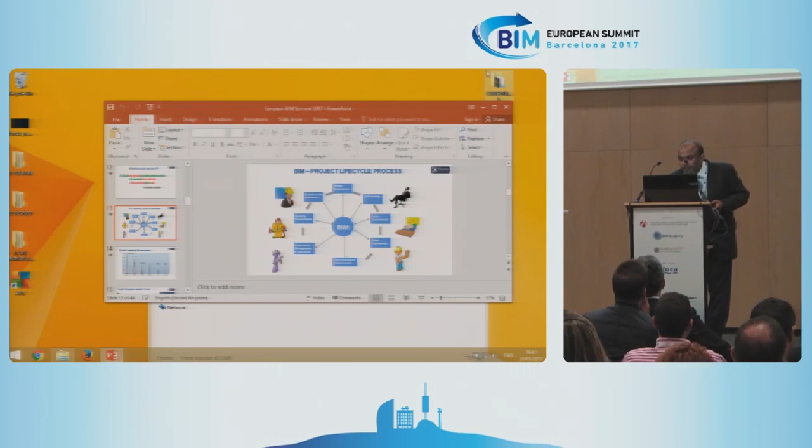Look at this stadium that we are doing now in Doha. This stadium is just starting to build, but the whole planning, every day, what work will be done, where will be the site logistics, just look at this, how you're going to do your construction, everything is planned in this particular project. It's a huge new stadium that is coming up for the World Cup football in 2022 in Doha. This is the inaugural stadium. And look at the level of planning, the whole site logistics.

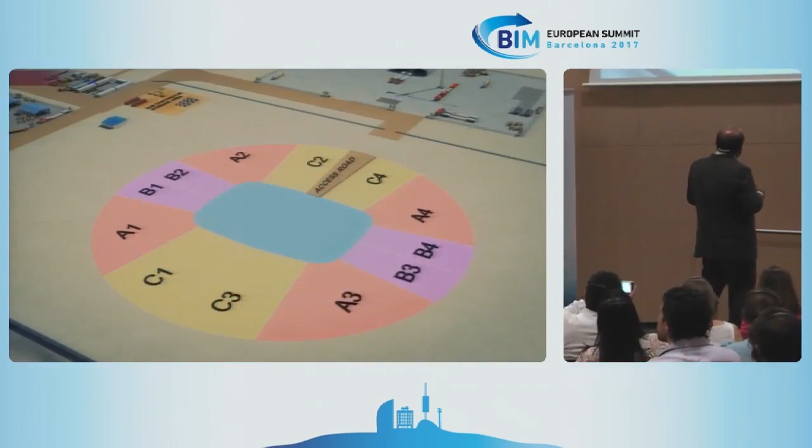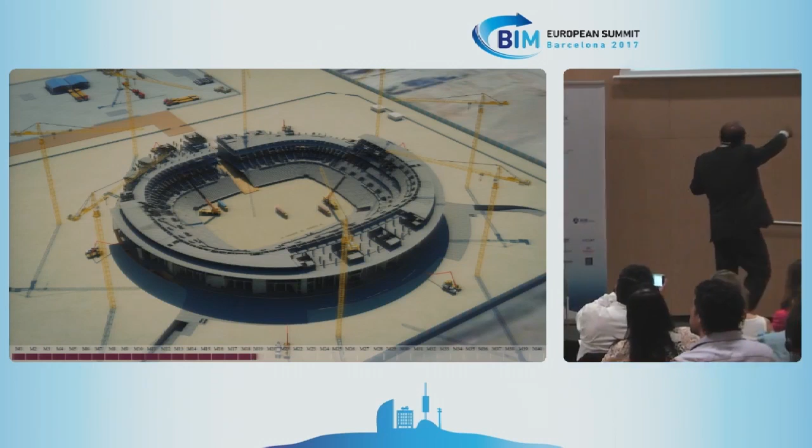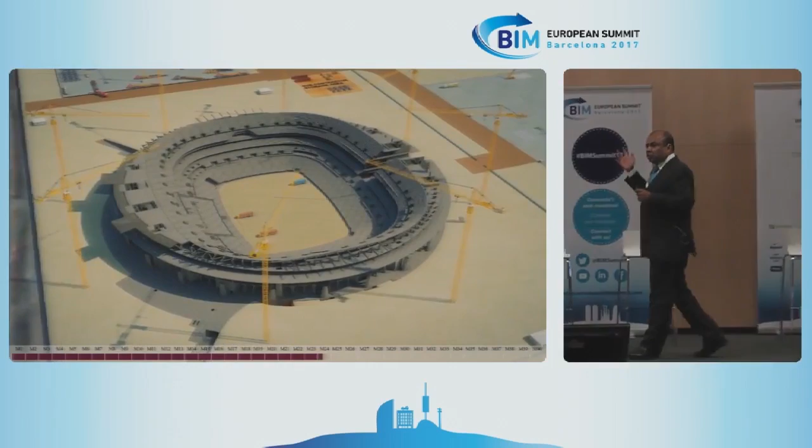I have reduced the total video because there is less time, but you see the cranes, how they are going to be placed so that they don't obstruct each other. So all the site logistics also needs to be planned. Every small detail, and you can see the time here, the monthly progress, so every day what work will be done. If you stop it and ask, okay, on 15th August 2018, where will we be on the project, you can see from this planning. This is the level of planning we are talking about, so that we have complete details about the project. There is no way, the time frame is so short for this project, and you have so many stakeholders, we cannot complete this project unless we have this level of planning in our work.

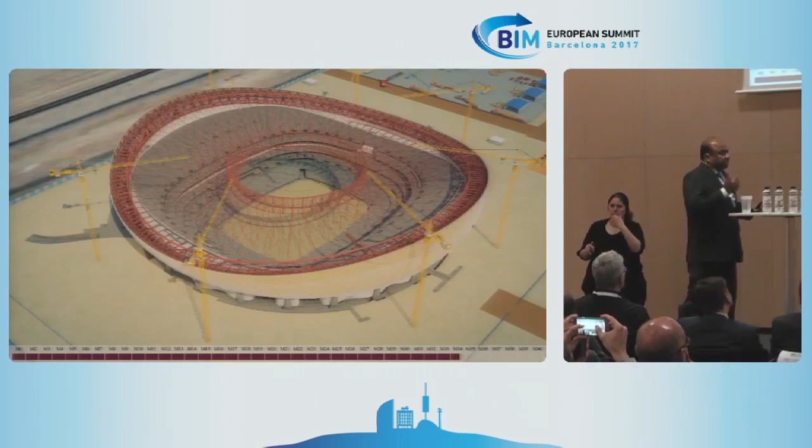And the best part is, for construction management, we get all our quantities. You want to know how much concrete is going to be used tomorrow, day after tomorrow, how much steel, what will be the cash flow, how many workers will be required, how many machinery will be required. So you get all the details from this particular type of coordination.

Okay, I'm going to now talk about another project that we are doing, and as the topic suggests, when you have such complex projects, what do you do beyond normal BIM? What are the innovations you bring on?

We are currently working on the tallest building that is coming up in Jeddah. It is 1.1 kilometer tall now, though it shows 1 kilometer. They keep increasing the height of the building because they want to remain the tallest. They are almost 30% more than Dubai.

The total area is 6 million square feet. There are 252 floors and 4 basements.

There are 59 elevators in this project, and for the first time I'm going to see double-decker and triple-decker elevators. There is 105 meters, 30 floors inside the ground, so you can imagine the kind of foundation that this building has.

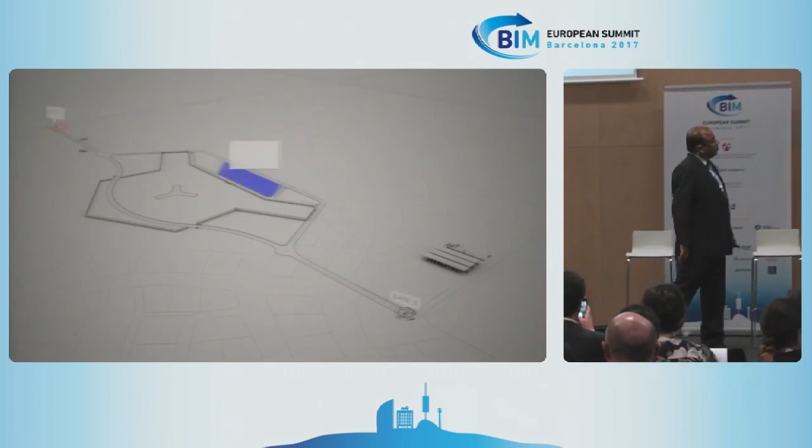Let me show you a small video on this. Just see how this building is getting constructed.

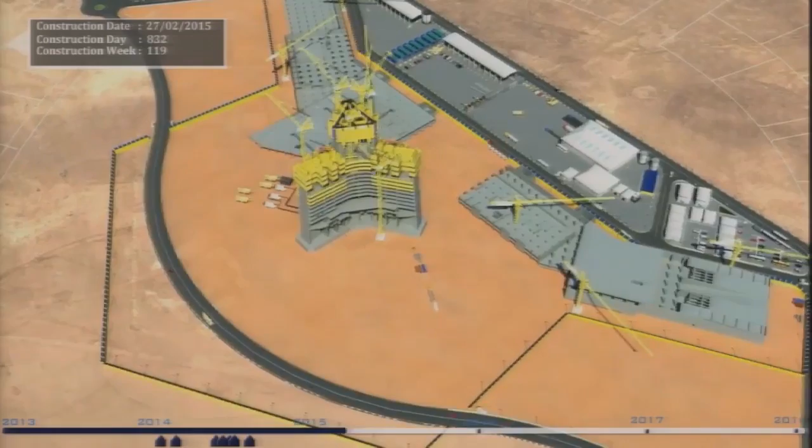We have already done the coordination till the 100th level, and they're pouring at around the 55th level now. It's slightly behind schedule. It's going to take another 2 years, probably 2.5 years, to complete the whole project, but it is amazing.

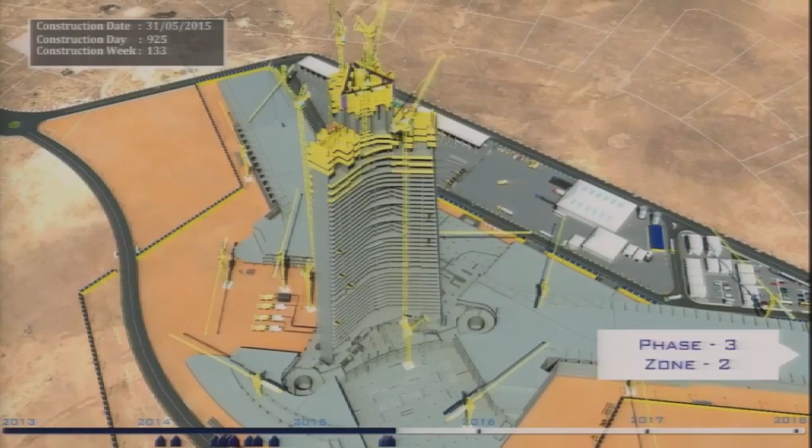You can imagine at the 150th level, if you have to take your pipes and windows and doors, it has to be absolutely accurate.

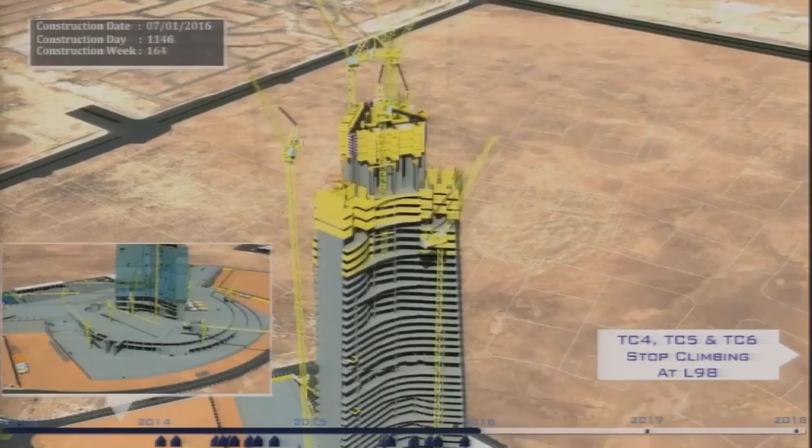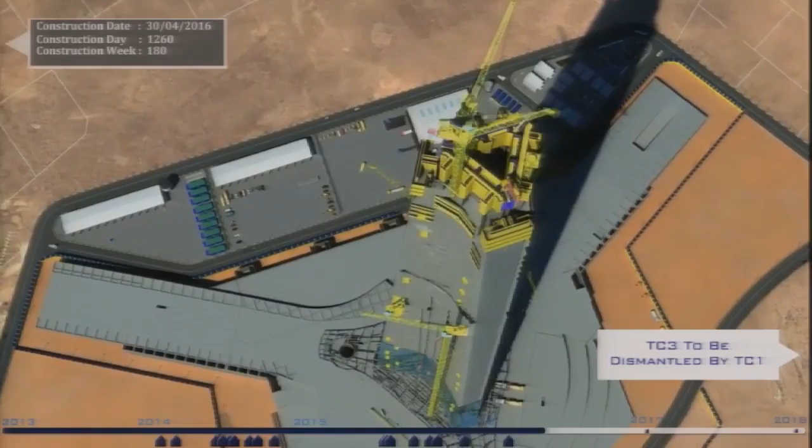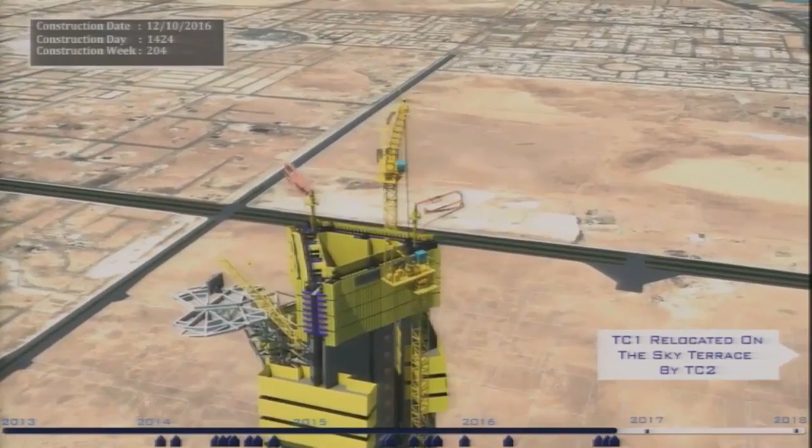As you can see, the core and the wings - the core is going first, and the wings follow that. In this project, the structural engineer will not allow you to touch the walls, the core walls, because it's so critical. So if you have forgotten your sleeves, you just can't make any more. You're not even allowed to put a nail inside the columns and beams.

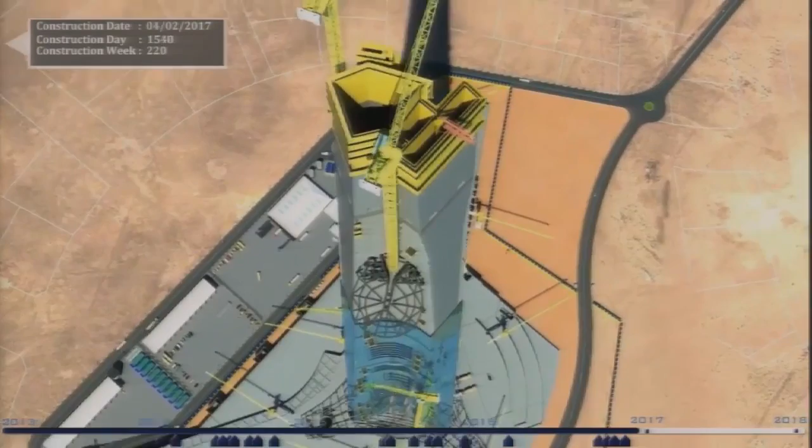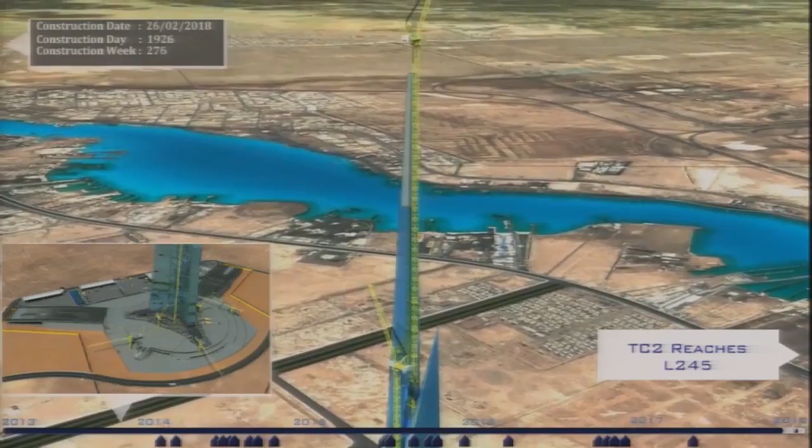So the coordination becomes very important. All the MEP services running through this whole building have to be pre-planned, because there's absolutely no way you are allowed to drill holes or even put a nail in this building.

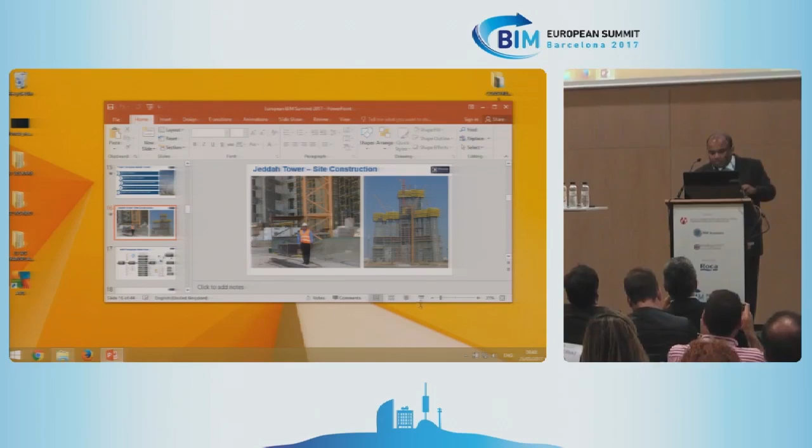Okay, let me come out because we have shortage of time. Okay, let me quickly go.

So what do we do for executing this project? First thing is the collaboration, because you have so many design consultants, architects, owners, so many contractors. So we have created a very important collaboration, the BIM execution plan. It was very special because there is so much involvement - we have to do the design development, and you can imagine the millions of documents generated in this whole project.

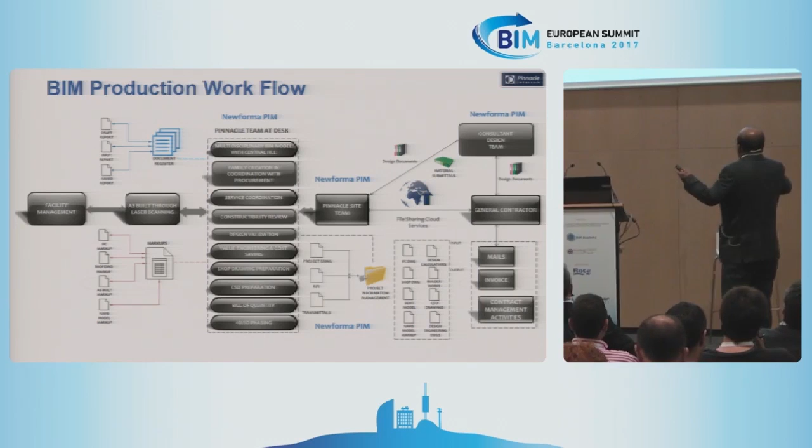For 3 years we have been working on this, with more than 100 people, so you can imagine the kind of documents. We are using Newforma here, where we integrate everything on a cloud. Every document, every renaming, every plan has to be very well done for this type of project.

Now, design engineering - you have to recheck all the pump head, because the original concept design requirements are changing. As the hotel owners get finalized, the marketing team changes the apartments, the layouts are changing, the usage is changing. So you have to calculate everything fresh.

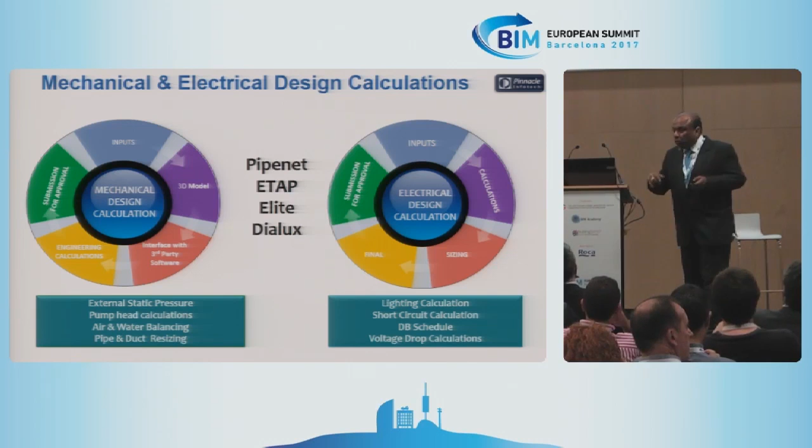So what we have done is, from the Revit model, we have integrated with various design analysis software to do this particular design - whether it's external static pressure, pump head, or air. For example, we are using Elite to calculate the ESP.

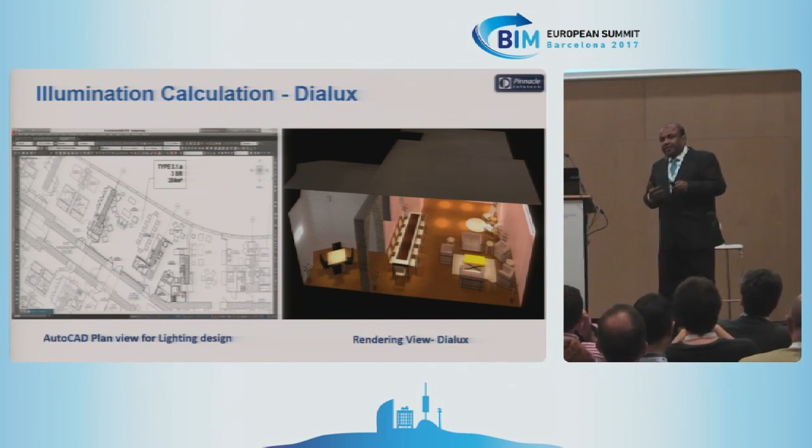Similarly, for dialux, now you have a lighting requirement at every area, in the corridors, in the rooms, so we use the dialux software. Similarly, PipeNet, ETAP, and there are many softwares which you need to interface very intelligently with this.

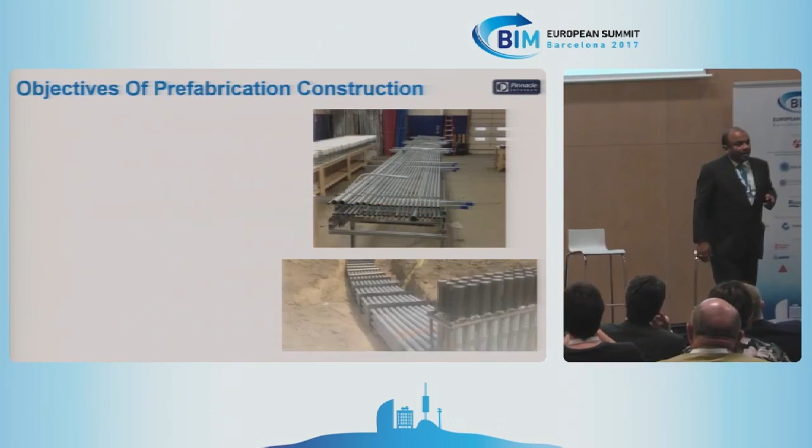Now, this is another thing I would like to show you. This is very interesting - today we are talking of modularization. The way we do MEP services, traditionally we have been hanging each service separately.

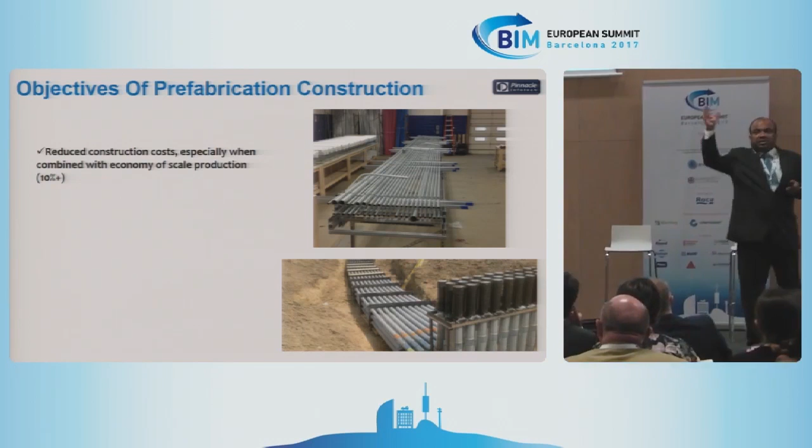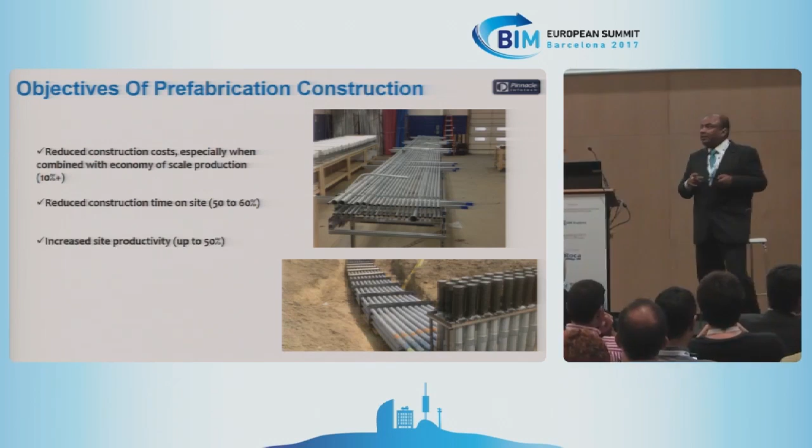Time has come when we combine all these services into one module, one rack, and just hang them. Now what are the advantages? I'll show you. There's a 10% reduction in cost because of economies of scale, 50 to 60% construction time reduction on site. The productivity goes up. Now what is modularization?

Now this is the traditional on-site fabrication. In one of the projects in the US, you can see that outside there's snow going on, and inside that building it's a hospital project. So they have pipes on the racks, they weld it on site, and if they cut any pipe, it is a waste.

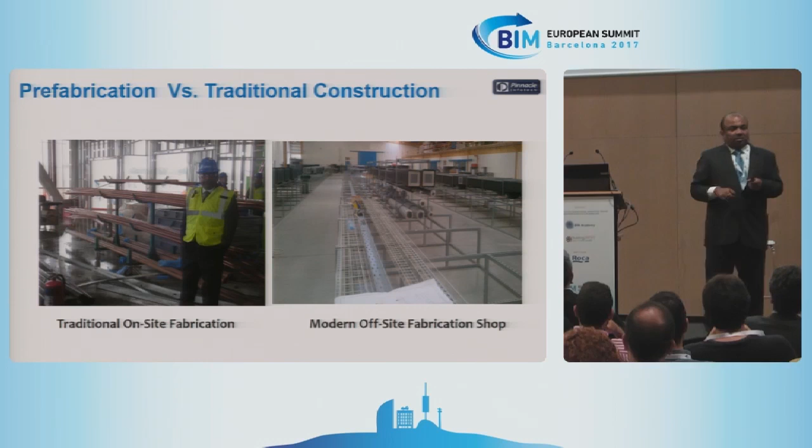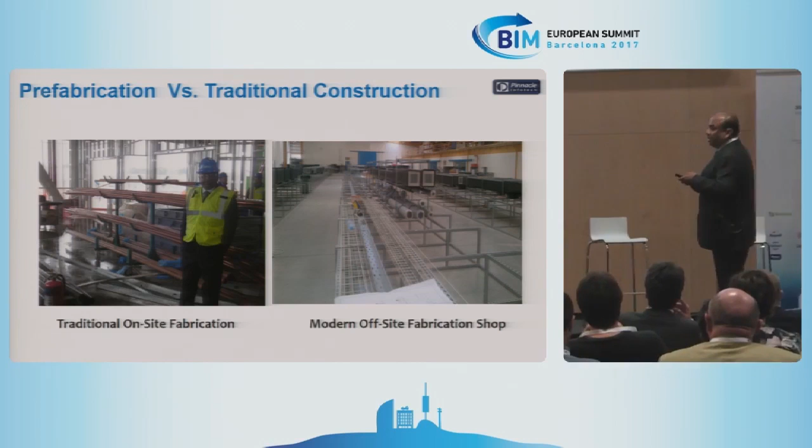Whereas today we have to industrialize construction. We have to, as the term was used yesterday, make assembly lines like cars and automobiles. We need to have assembly lines for creating our MEP services, for concrete, for everything. So this is what we need to do. Let me show you.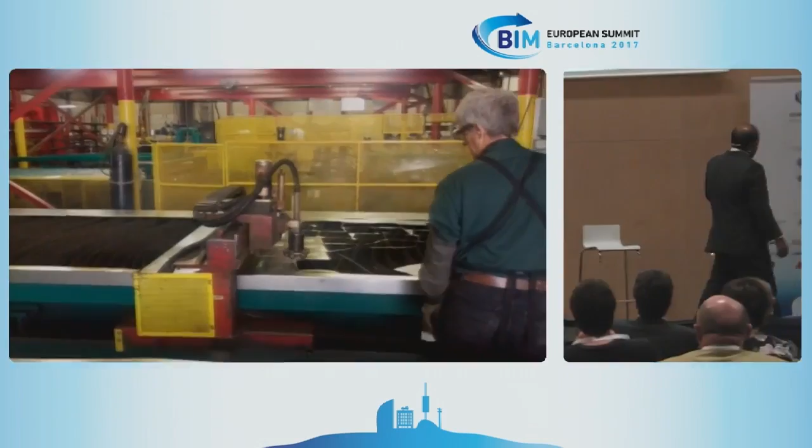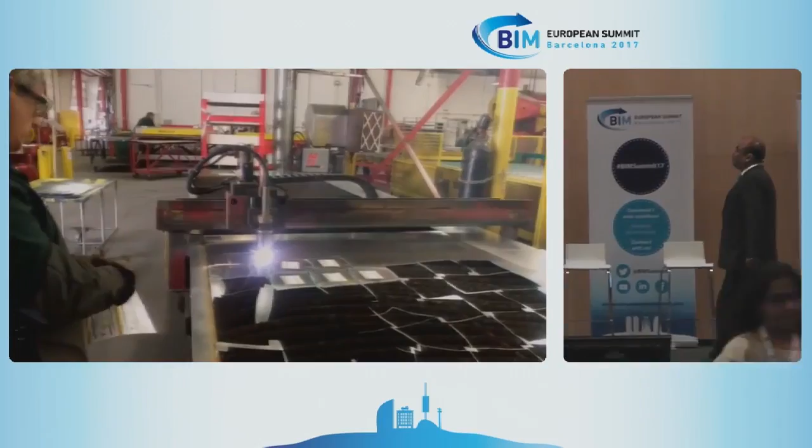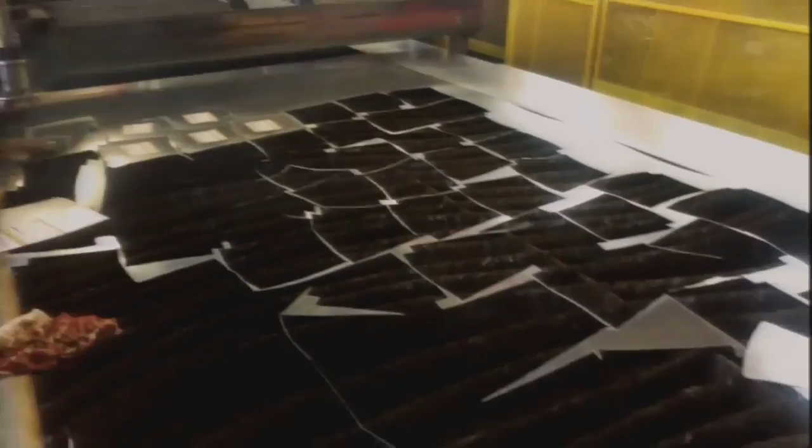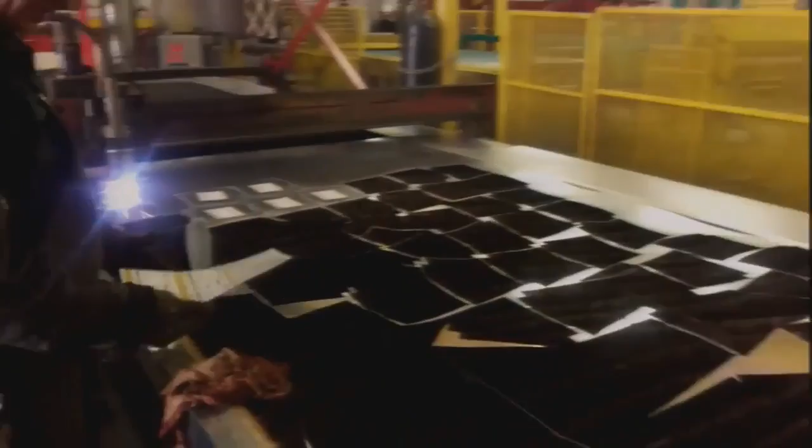This is another very nice video, just see this. This is the sheet metal for air conditioning, which is being cut. Now, from the BIM model, it directly goes to the CNC machine and it cuts it. And it's got the scan codes, putting the scan code on that, so that on site they can just use it.

Now, how many of you are general contractors? Can you please raise your hand in this room? General contractors, MEP contractors. Okay, they should be, because this is really relevant.

I don't know how much it is being used in Europe, but if you look at this, look at this sheet, it's just 2% wastage. So if I have a big sheet, from my model it's directly going to the CNC machine, there's no manual interface. The machine calculates, optimizes, from different ducts it will optimize to cut the sheet to reduce wastage. Everything is automated, and you can see the end product, nothing left in that particular sheet.

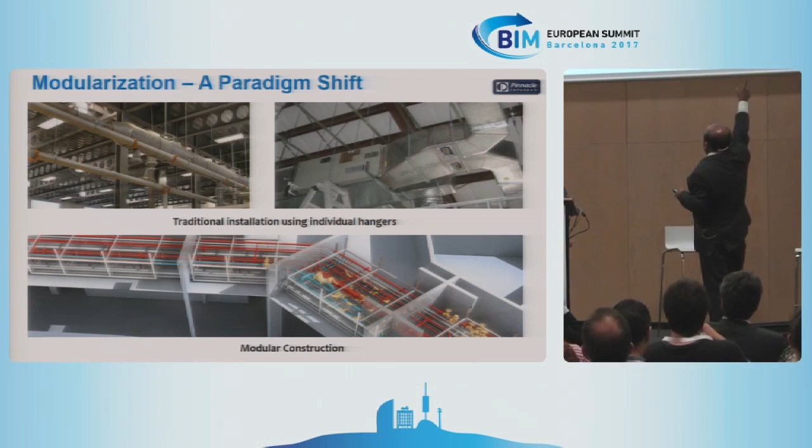So when you're having this fabrication, traditionally this was done, the modular, look at this, how it is being done. You manufacture everything in your fab shop, take it on a truckload, take it to the site, and just put it inside. So it saves when you're working on busy airports, when you're working on additions, renovations in the center of the city. This is the only option left because there's no space for work in the city.

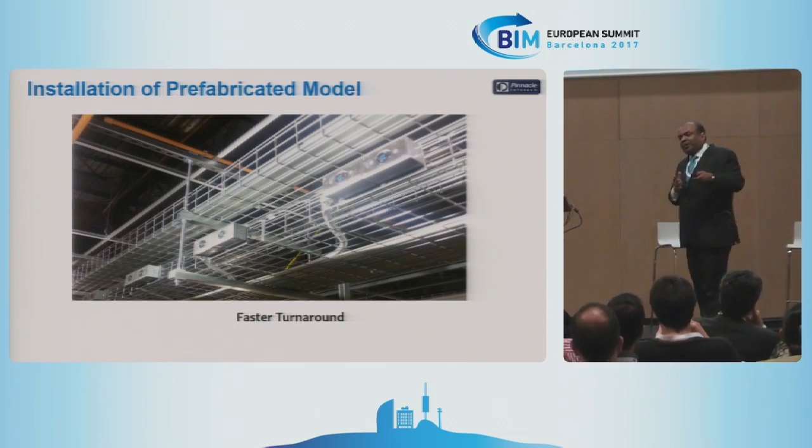Look at this, so everything is fabricated in your shop. Your site labor is much costlier, there are weather conditions so you cannot do it always. But if you've done that in your shop, the quality is much better.

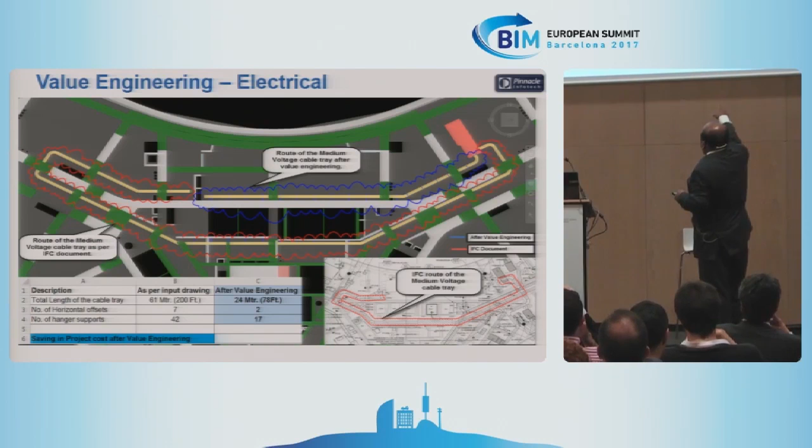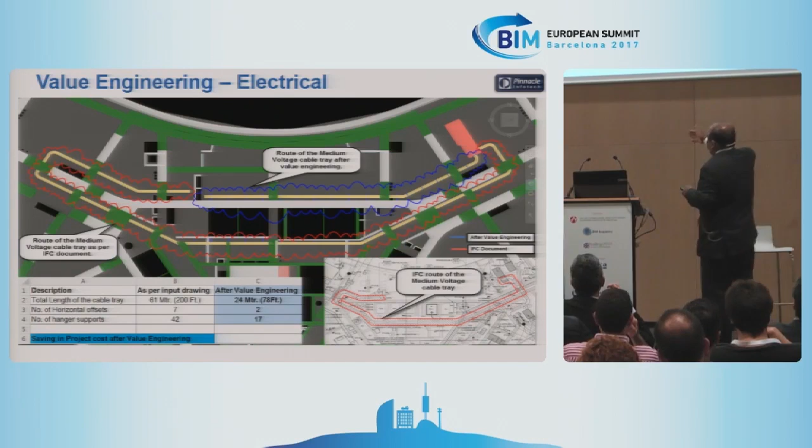Similarly, value engineering. When you come to BIM, we have to reduce cost. If you look at the original design, there was 61 meters of cable tray that was used. We could reduce that to 24 meters by optimizing inside the BIM. So once you have everything in 3D, you're able to find better routing, the number of hangers goes down, the number of offsets goes down, so it's much easier.

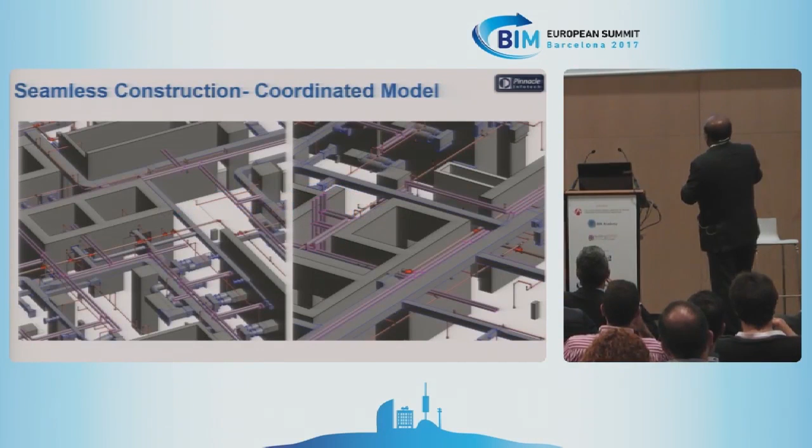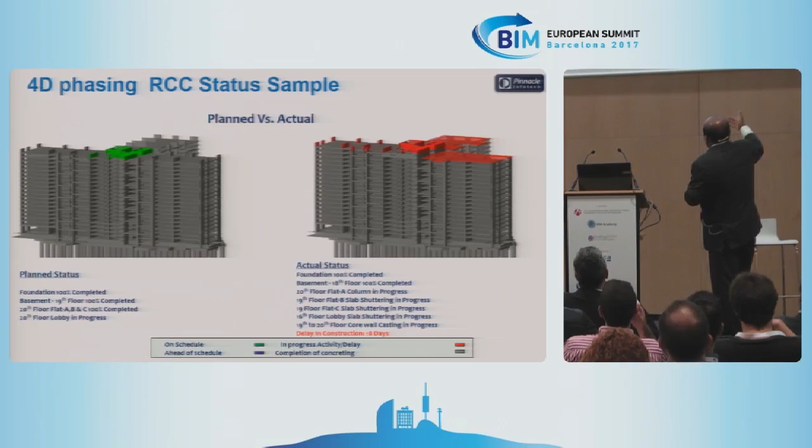So these are the value engineering experiences. Now, this is what we want: the construction management, the GPS-based solutions. We have seen the site logistics, construction planning management. We'll have questions at the end. Thank you, my time is up. I wish I had more time to show you various case studies, but thank you very much for your patience.

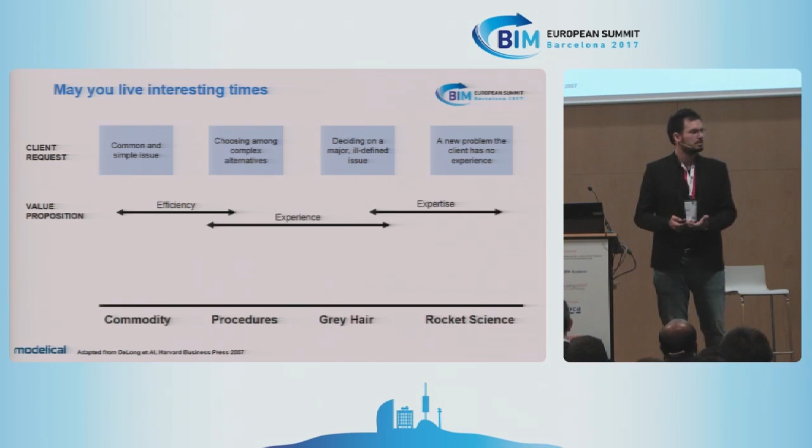The value we are providing in such different cases is different, right? It changes. We need to be efficient if we want to solve commodity problems. We need to apply experience if we're going to go for the middle, and we need to have expertise if we want to do rockets. And the different skills you need to follow on your organization are going to be different as well, right? If you have to be efficient, you have to have the right tools, the right processes. You have to have the right knowledge management strategy. You have to be up to state-of-the-art technology, and so forth, right?

And if you look at the bottom row, many of those words there are very related to BIM, right? Very, very connected to BIM. You could speak about all of those without leaving the BIM context. So let me throw a question at you at this time in the morning. Where are you, right? The things you do, are you solving commodity problems? Are you solving gray hair problems? Are you solving rocket science problems, right?

If we were to make a survey here, based on your self-assessment, this is what we get. None of you is going to say it's doing commodity problem. You know what a commodity is, right? And a commodity is something like water, right? You will open the tap, water will flow. You don't actually go on tender. You don't ask where the water comes from. You're not asking for its BIM implementation plan, right? You just open the water tap and it comes. It's a commodity. It's like when you ask for modelers to be sourced to your company, or you are asking for a model itself, right? It's starting to become a commodity.

Right? So if we were to do a self-report here, this is what we get. No worries, it's okay. But if we look from an empirical point of view, we get some judges here looking at what we actually do, including all of us, this is what we get, right? We're most likely doing commodity work, right?

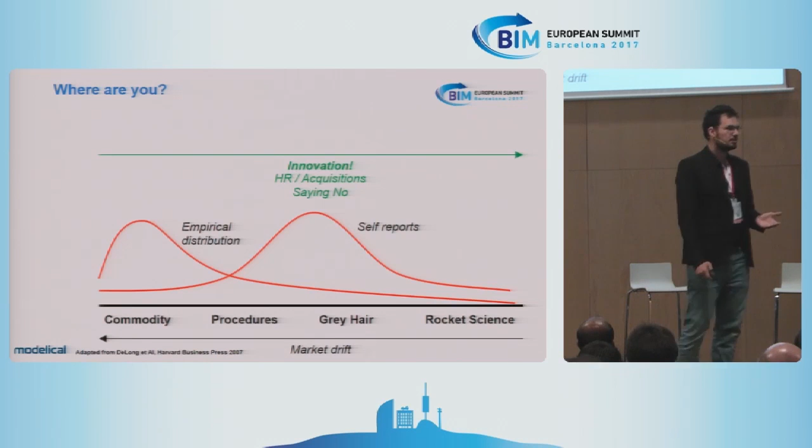Well, of course, innovation is one of the things that will make that happen. But there are other ones, right? We could get skilled people, we could buy skilled companies, or we could say no to commodity work. You could say no and say, I don't want to do this, I want to focus on my rockets, I want to focus on my high-expertise, high-paying work. But at the end of the month, you have to do the payroll, you have to pay the bills, right? So sometimes it's hard to say no to commodity work.

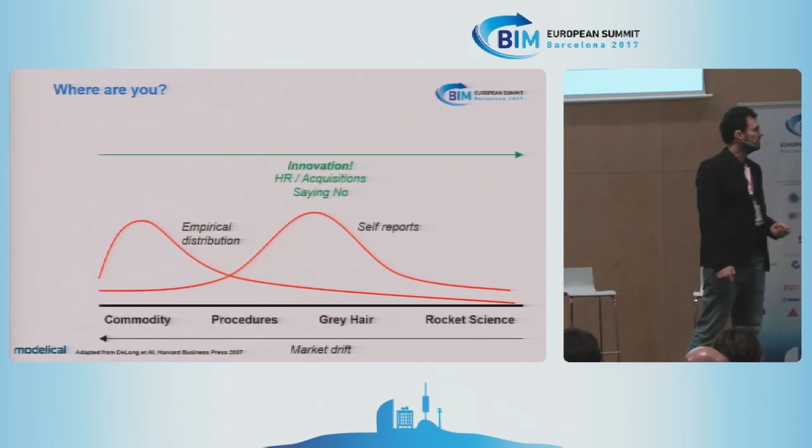Let's now look at the value all this brings to the client. There are things you can do that bring value internally, and there are things you can do that bring value to the client. When you're doing commodity work, the client isn't very worried, they just take for granted you will do the work. So innovation there doesn't pay very well to the client, it pays well internally. If you're going to innovate when doing commodity work, it has to be for yourself, otherwise you're doing it wrong, because somebody else will underprice you and you won't get the commission.

But of course, when you're doing rocket science, the innovation goes to solving a big client's problem. Besides that, you could provide your client with insights, so when you're not only solving the problem but making them learn something new based on your experience and the things you can do, you are adding value to the client.

And of course, there's always marketing. I used to think marketing was a perverse thing, but it's true, you need it, you need to spread the message, tell everyone hey, this is what we're doing, we're cool, you want to work with us. That works well the further you go to the right, because you also have to explain better what you're doing. When you're doing commodity work, you don't need to advertise, it's not that important, or it's hard to improve the message on top of that.

All right, so my key point here is that BIM, as you know what BIM is, I see it as a huge innovation opportunity—not only in the sense of being able to do things differently as a practice or as a sector, but also to provide new solutions to our clients. Let me give you some samples. Let's have a look at five samples, five levels of things we're actually doing at the office, and how they relate to what you want to do.

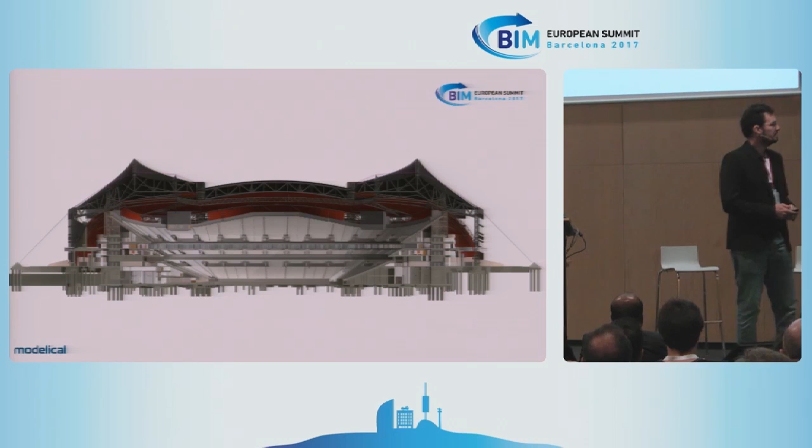It's a project we did with a partner in Qatar as well, and we were actually commissioned to build on top of the detailed design, CAD drawings. We were able to do a pre-construction model for just finding clashes and ensuring everything was fine. I'm not going to bore you, but we basically applied many different ways of automation.

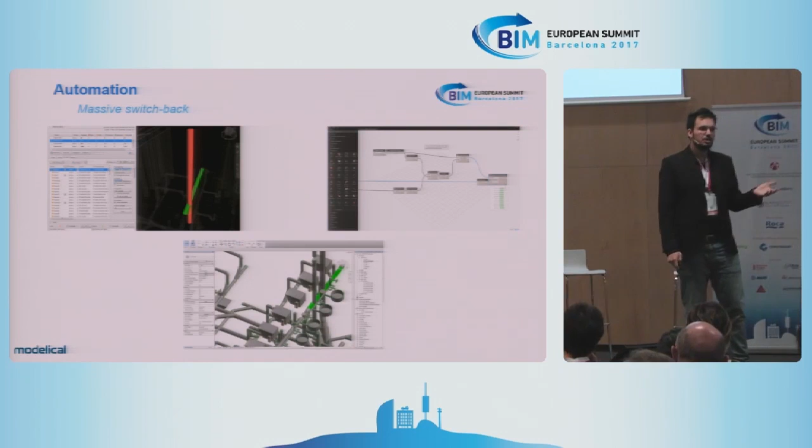For instance, we would go to Navisworks, look for clashes, and instead of producing this massive report - I don't know if you've been lucky enough to go through one of these clash reports - instead of doing that, we would just basically take or mark the items back into Revit automatically. So you could apply a filter, you could apply special views and see which elements were directly under an issue.

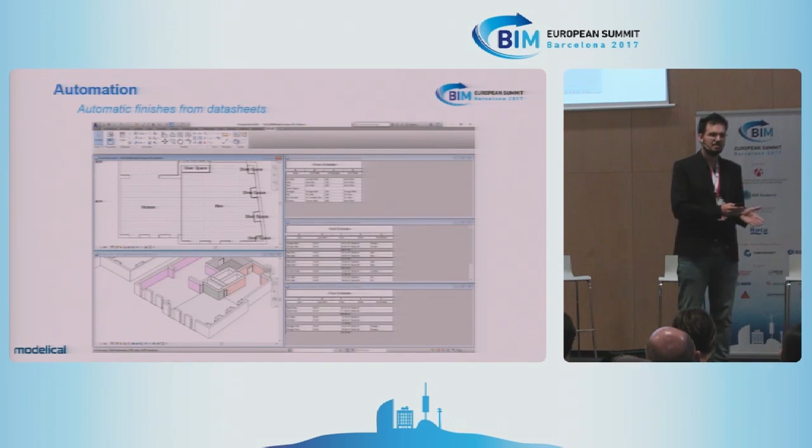We would also use spreadsheets to assign finishes to different rooms, and based on that, we would model the finishes on each one of the 2,000 rooms in the project automatically. Of course, that doesn't solve 100% of the problem, but we would solve 80% of the problem. So you need less people to do it, and you are making less mistakes.

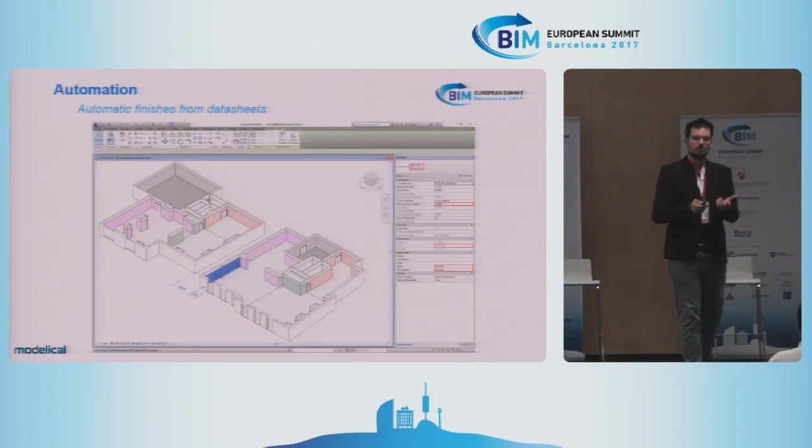What this would do is it will read a room's perimeter, and then it will read an Excel spreadsheet and will just apply the walls, the thin walls for the finishes. That will be the result, okay?

Then we started working on another project. This was almost one year ago. This is an airport - this is public. I cannot speak much because this is still under confidentiality agreements, but this is public, so you can see this, of course. And in this project, we again applied a lot of automation.

We basically were able to model hundreds and thousands of panels, thousands of roof lights, not even touching any of them, just applying computational techniques. We would just move between different tools - we would use Revit, Grasshopper, something called Flux, and we would use Excel, we would use AutoCAD. We would use many things just to drive the information in the best way possible that would spare us from modeling anything by hand.

If I give you a quick summary of this - something we did in 2014, it would take us six months to produce that model. Of course, it was more detailed, it had all the MEP on it. And I'm giving you some insights there - we were able to model almost 3 gigabytes of Revit files, clean Revit files. But the most important metrics for us are those 8,000 warnings and 6 months of work.

We were not good enough at that time. We would make a lousy model, it was not very good. But next time we had a big commission - because this airport is 1 million square meters - and we were commissioned to make an LOD 200 model in 4 weeks.

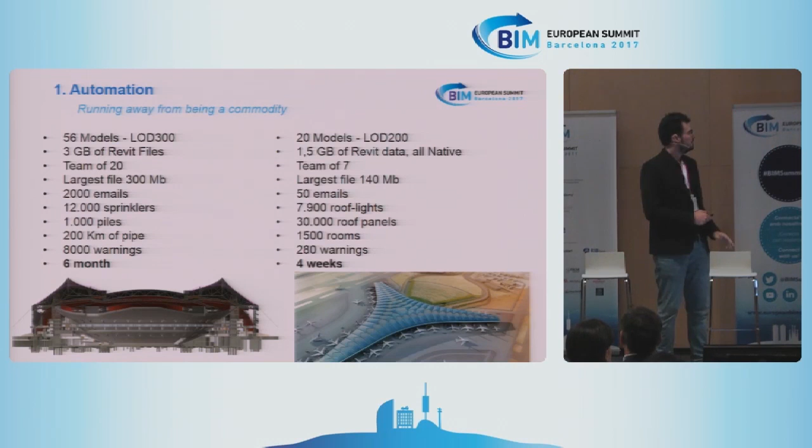Well, just how do we get there? How were we able to do this kind of work in 4 weeks? Not doing it manually, not trying not to do it - we just applied automation on it.

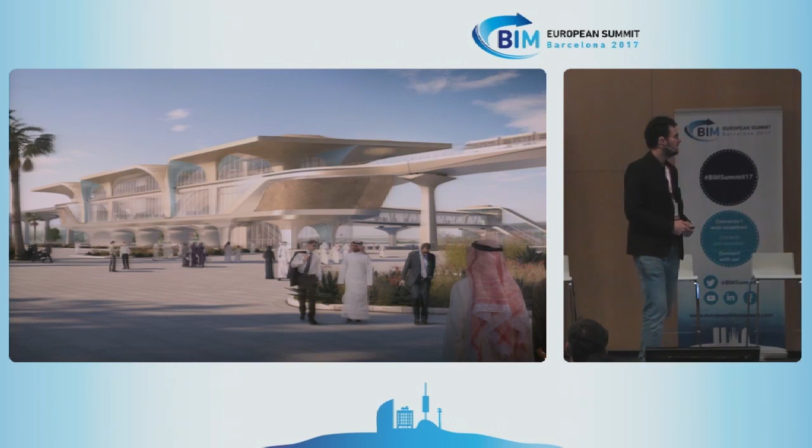Another project, which is also very famous around, many companies working here. We were lucky enough to work with several Spanish companies, and in this case, something we did for Sener. We have some good friends with Sener here with us today. We were commissioned or asked to model 6.5 kilometers of cladding in less than a month.

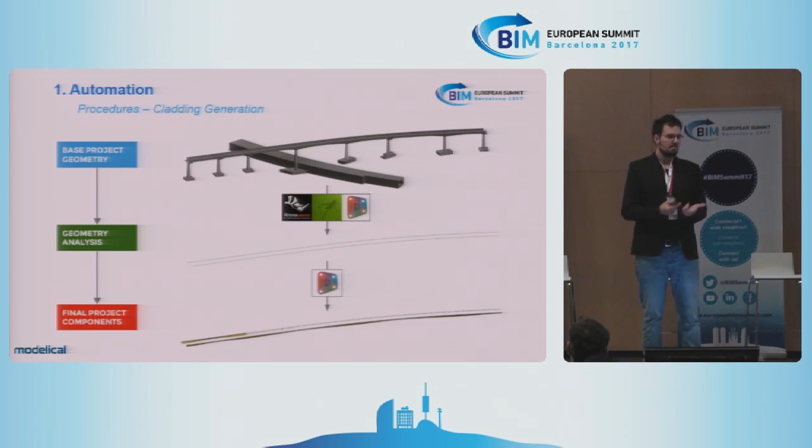Actually, they were like, Revit is not good for this. It's not. Actually, the guy who decided to do this in Revit and the guy who decided to design the metro like that are not the same guy, obviously. But by mixing different tools, by using information in the right way, we were able to produce all the cladding, or at least a preliminary version of it, in 2 days. It would have taken us months to do it by hand. So that's why we didn't try it.

You can see that's...

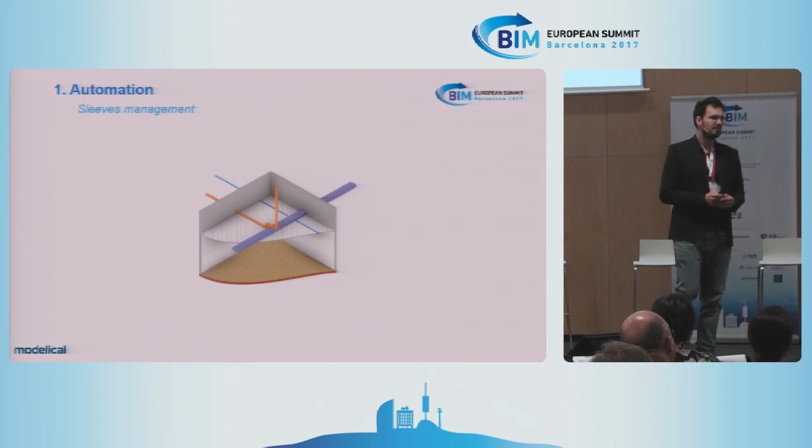Other things we do is apply a lot of thought on coordination. What you see here is a workflow we've been applying on the Santiago, Chile airport. We try to avoid coordination manually.

We create or find clashes between structural elements, structural walls and slabs and MEP elements, and place dampers and sleeves automatically. That's actually a coordination model, because you can exchange that model with the MEP engineer and the structural engineer, so both can speak on top of that third coordination model. And since each object has its own ID and its own properties, you can assign and review them independently. That's another way of applying automation to improve certain workflows.

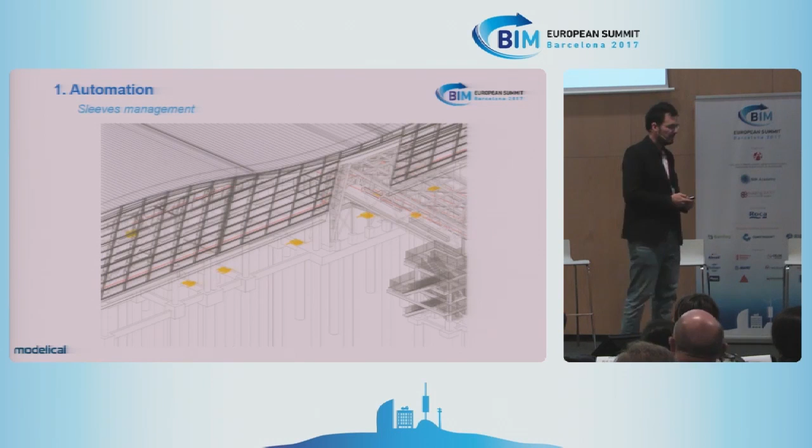You can see there the foundations of the airport.

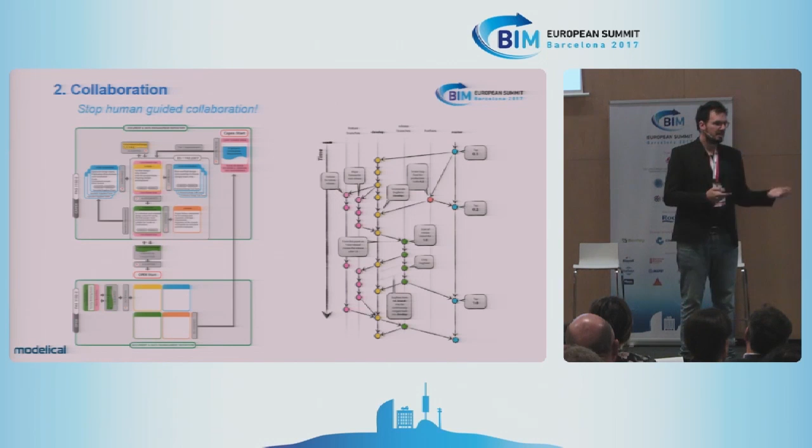Next topic I think we need to focus on for innovation is collaboration. I think we have to stop speaking about repositories and strategies and look to other industries, for instance the software industry. If software engineers were to produce software in the same way we produce models, we'd be lost. That's because they don't worry that much about the tools they use for collaboration, because the tools take care of the collaboration itself, making it more transparent.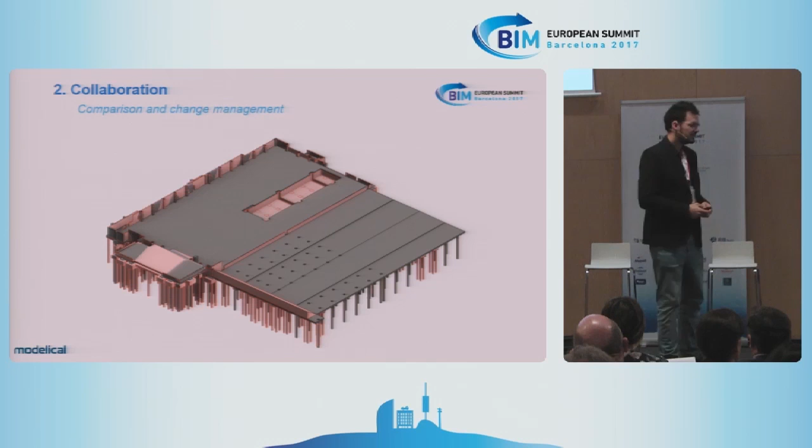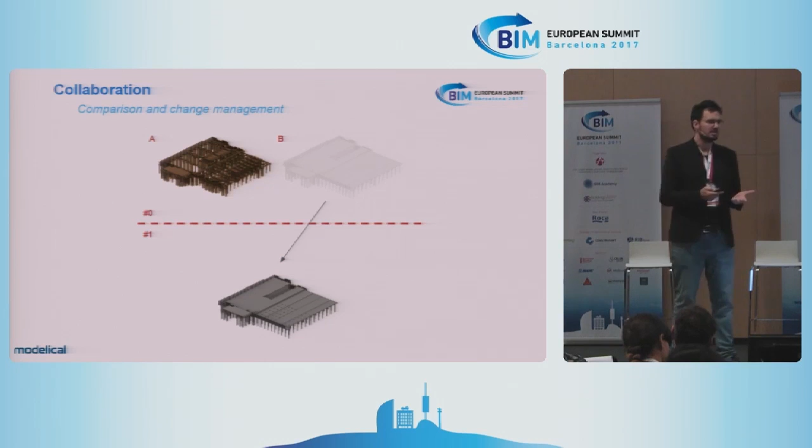We've been trying to focus on change management and comparison of different models in several projects with Sacyr on construction stage. We came up with a process where you'd always be able to track the changes along the project and make comparisons between two steps of the project. It's very important, because when changes happen in BIM, you have to look for them. You can mark them up somehow, but it's hard, it's still a hard task. And I don't see any of that in PAS 1192 - how do you manage changes properly?

This is what we need. It's very lousy, but it's a code comparison tool - you get the original code, the new code, and the tool will tell you where the differences are. It won't tell you if it works or not, but it will spot the differences for you. Do we have this for BIM? Not very clear, so that's another space for innovation.

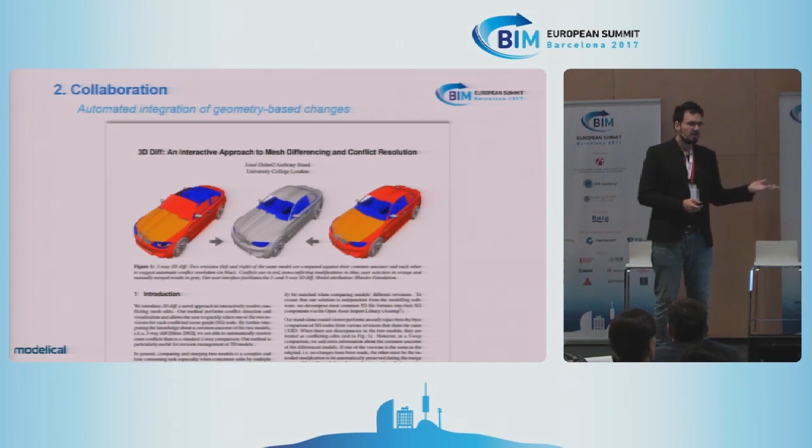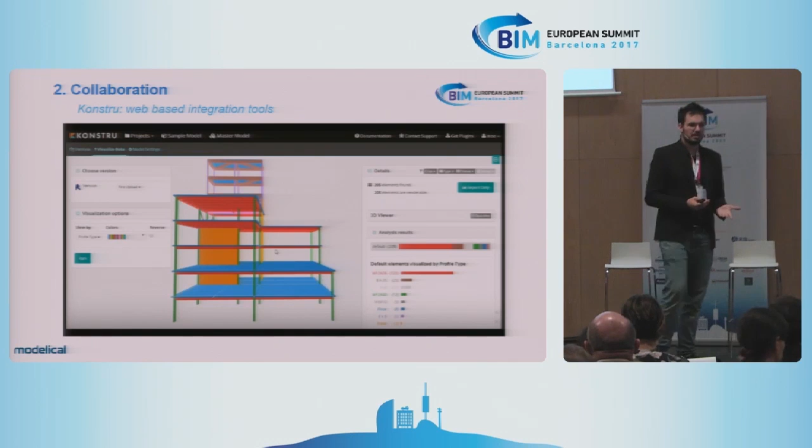There are algorithms and tools out there already trying to tackle this. For instance, Konstru, a tool coming out of an engineering firm, Thornton Tomasetti, actually trying to solve that for the structural design part.

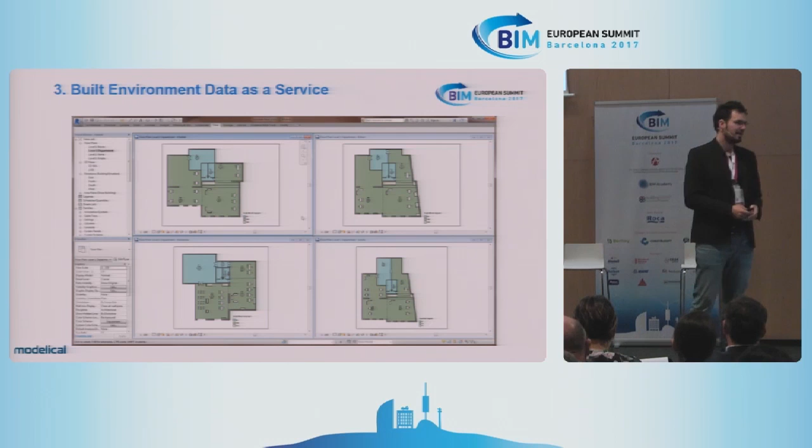Third area of innovation is what happens if I put all the information that describes a building available to everyone, or available for all purposes. Fernando gave us a great lecture yesterday, but this is basically the same idea.

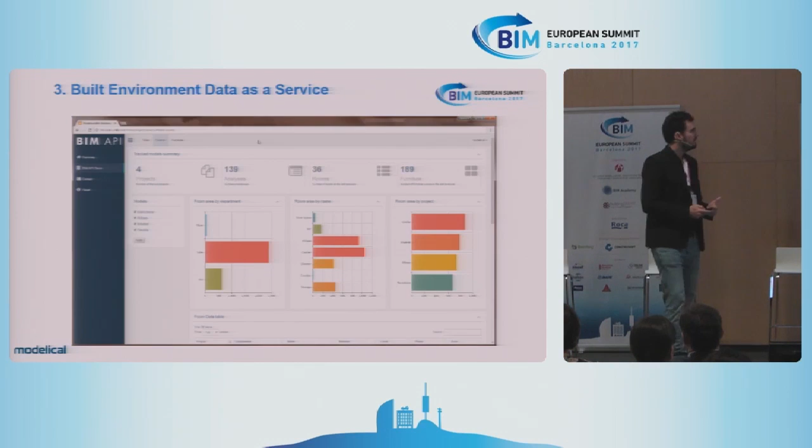You could think about the information described in a building as a service, in the same way your Facebook feed is a service that can be used by other tools. The idea is that information describing the built environment could be mixed with other areas. And who's going to do that - software engineers? Why don't we do it? We are the ones who are expert in the built environment.

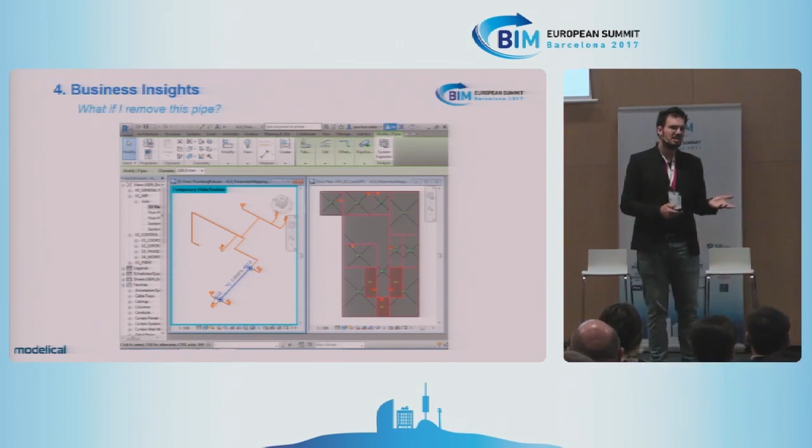Also business insights - this is something we did for a client who was about to build a stadium. He was asking, well, I don't need a very detailed as-built MEP model, what I need to know is if I remove this pipe, which spaces am I going to render unusable. So that's what we did - we modified Revit so that if you remove this pipe, you can see I'm serving three fixtures, so I'd be killing those three rooms. You're able to do that with the model with just a tiny bit of programming on top. That's a business insight because you can make business decisions based on that.

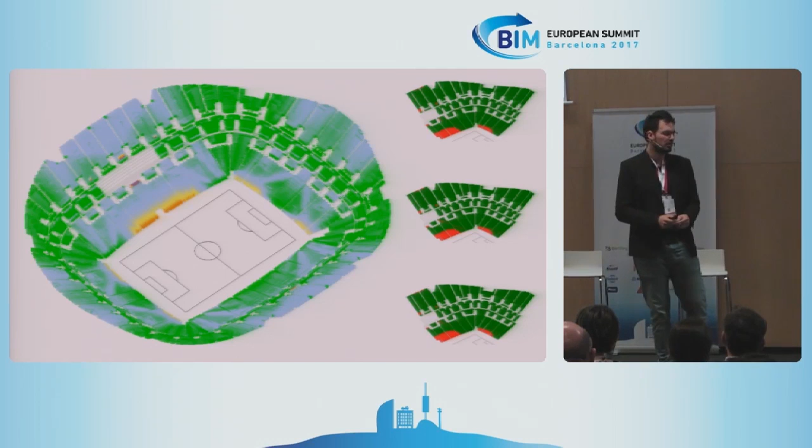Speaking about stadiums, when you have 100,000 seats on a project, you can do pretty good acoustic analysis. This is something we did for Al Khor Stadium, Khalifa Stadium in Doha, and we're also doing it in other stadiums currently.

Or you can actually start playing with information in a different way. You can offer your client ways of using those models that are more appealing, closer to the daily business. Here you have Camp Nou - this is something we've been developing.

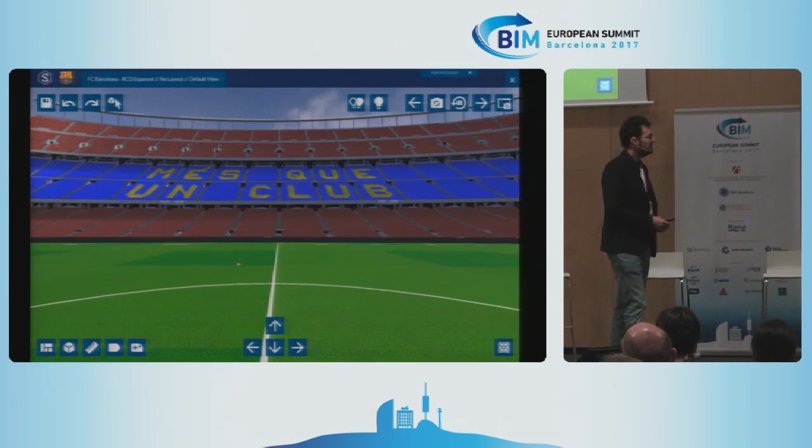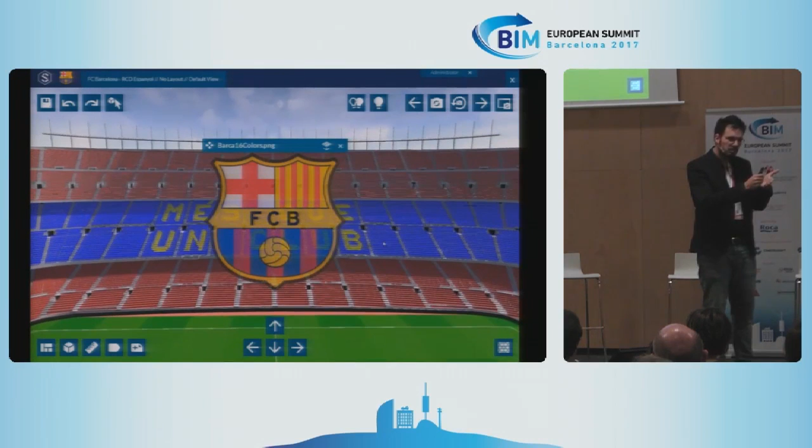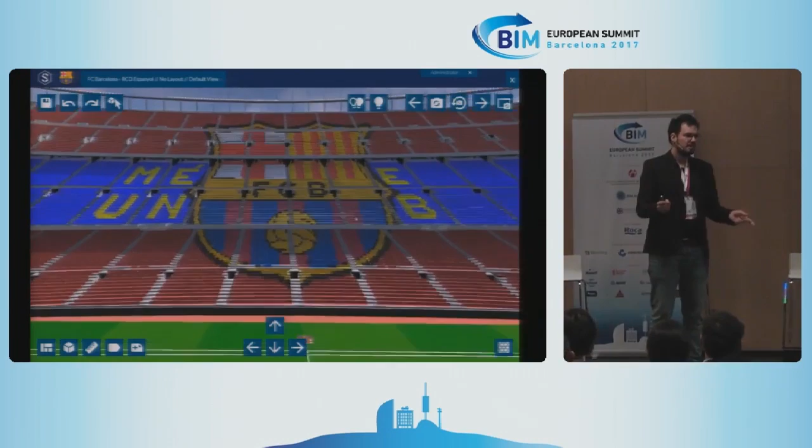We've been doing this for Barca in the last months. You know how they make the mosaics before a match, right? They have a guy just painting colors on an AutoCAD drawing. It could be this way instead: if you have a model, you could stamp it on, and then source that to the marketing guys or ticketing guys and assign the board colors directly. That's something you can do with a model. And who's going to invent that? A marketing guy? Why don't we do it?

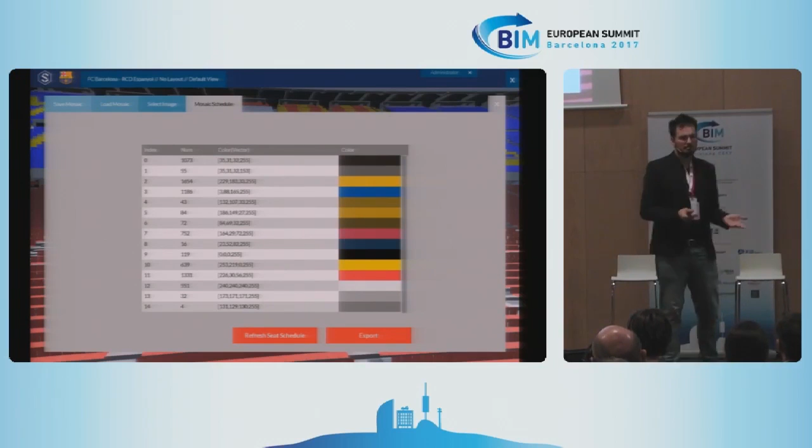And just to finalize, this is where we are now: when you start getting structured information about your built environment, where you can analyze thousands of stores, thousands of branches, thousands of locations, could you start getting insights out of that and automate design? We're starting to see that in some areas, like the grid, an artificial intelligence empowered web-based design suite. Are we going to see that in architecture and engineering? Well, it seems so. So who's going to invent that?